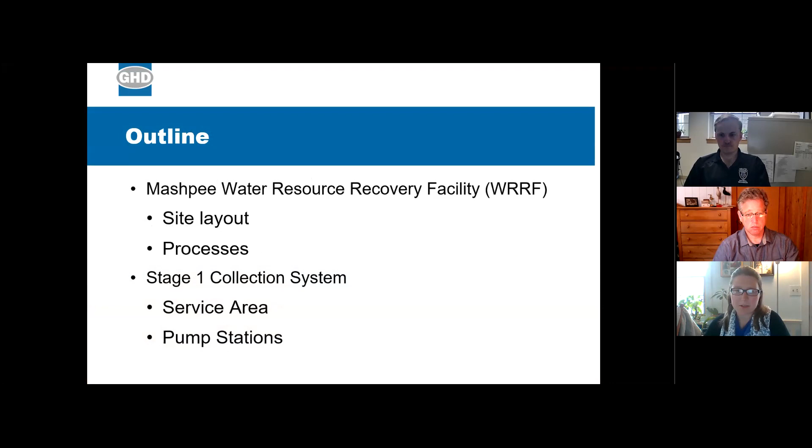We are currently designing stage 1 infrastructure, but have designed the facility to be able to have all of the infrastructure for all 4 stages within the footprint of the facility, which is shown in green here. So that footprint is defined by fencing around the site and landscape buffering. And in addition to that, we've been maintaining at least 150 feet of buffer from the site to property boundaries.

To the south of the layout is where the wastewater infrastructure will be. What's shown in yellow is stage 1 infrastructure. There'll be 2 buildings, which I'll discuss in a little more detail in a minute, and a series of underground covered tanks. And then what's shown in black dotted lines is space that's been reserved for the future stages of infrastructure.

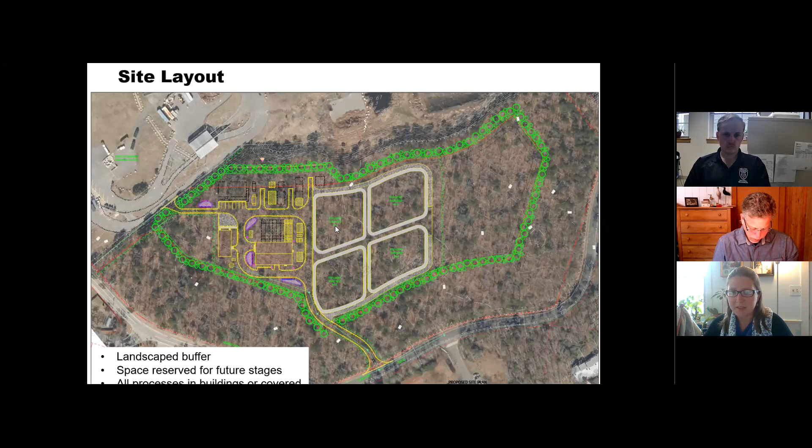Once the water is processed through the wastewater treatment facility, it'll be recharged to groundwater through 4 open sand beds in stage 1. And then to the north, there's been space reserved for future stages of sand beds. The infrastructure has been designed so that all of the treatment processes are either within a building or are in underground and covered tankage.

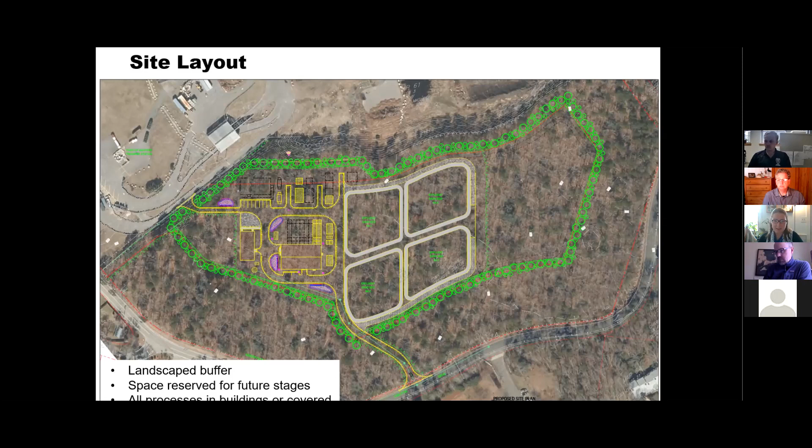The first building on the site is called the Preliminary Treatment Building. And so this houses a series of screens and a grit removal system, which takes the larger material that's in wastewater out of the wastewater before it goes to the treatment process.

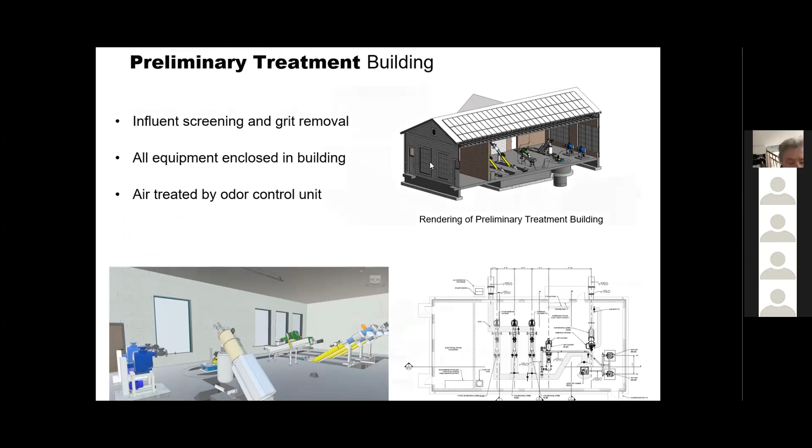Once the wastewater has been treated for nitrogen removal, it'll be conveyed to the UV disinfection room, where UV modules will be used to disinfect the water prior to effluent recharge. And the process building also holds a series of pump rooms. So the pumps are used to convey the water to the different treatment processes in the facility. It includes a blower room. The blower conveys air to the treatment process to aid in the nitrogen breakdown, and it includes a chemical room for the processes.

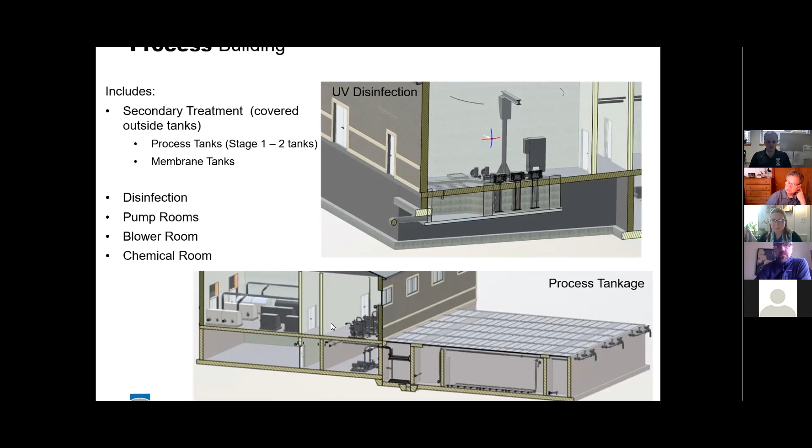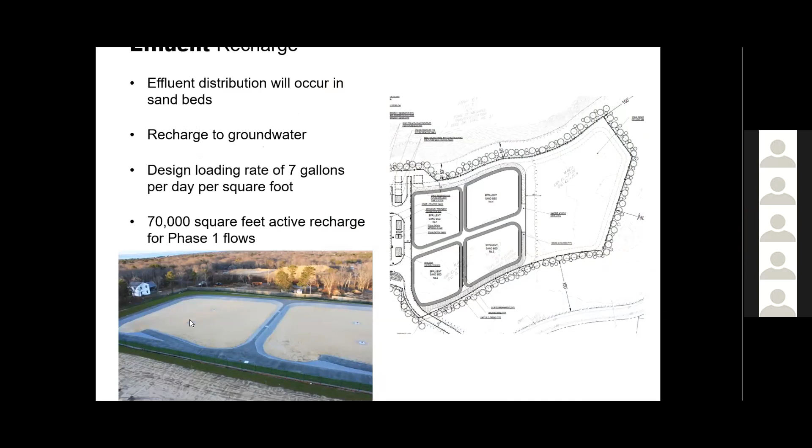Once the water has been treated and disinfected, it'll be conveyed to open sand beds. So this is an example of what open sand beds look like from Oak Bluffs, Massachusetts. The water will be discharged through pipes in the middle of the beds and will percolate through the sand to groundwater.

All of the air in the preliminary treatment building and in the headspace of the tanks, so that's the air between the cover and the water, will be conveyed through underground ductwork to a 2-stage odor control system. The first stage is a biological process, a biofilter, where there are bugs that break down the potentially odorous compounds in the air.

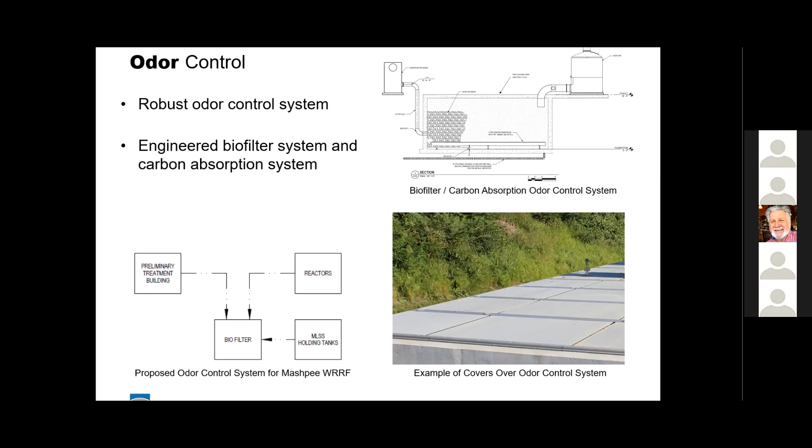And then the facility will also have the ability to convey that air to a secondary process, which is a carbon absorption system. And that's a physical process where potentially odorous compounds bind to active sites in the carbon vessel prior to being introduced back to the atmosphere.

And there's a small portion of properties, 10 properties, that will be connected through low pressure, which means that they'll have a small grinder pump in their house that will pump the wastewater to the collection system due to the elevation of that house. The service area extends to the northeast and to the south of the treatment facility, and we'll have 2 pumping stations which are used to convey the flow to the facility itself.

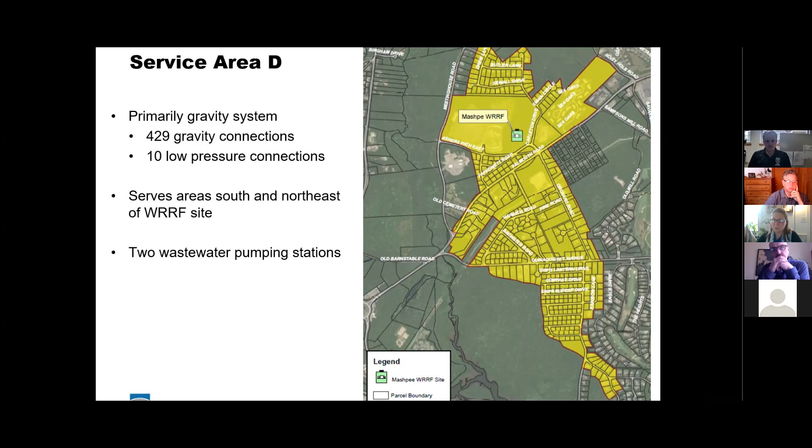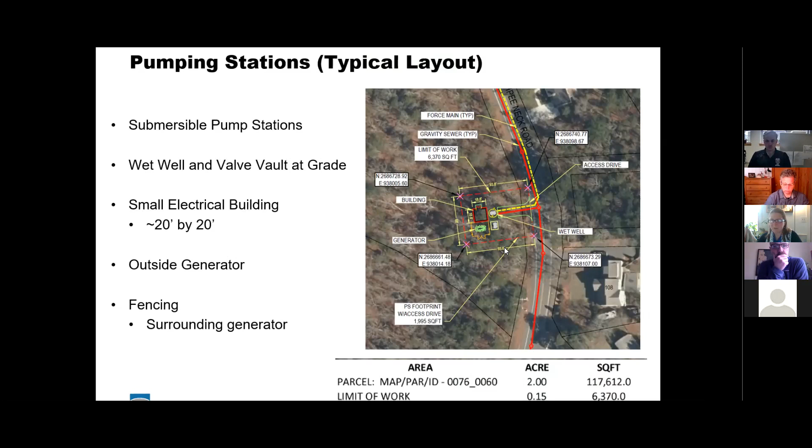All of the pump stations will have a very similar layout. They're submersible pump stations, which means the pumps are housed in a wet well that's below grade with a cover on it, and has a valve vault, which is another vault below grade that's used to control the flow in the pump station. The control panels for the pump station will be housed in a small electrical building that's about 20 feet by 20 feet, and each station will have an outside generator that will be fenced to provide emergency power if needed. And this is the typical layout that will be used for all of the pump stations.

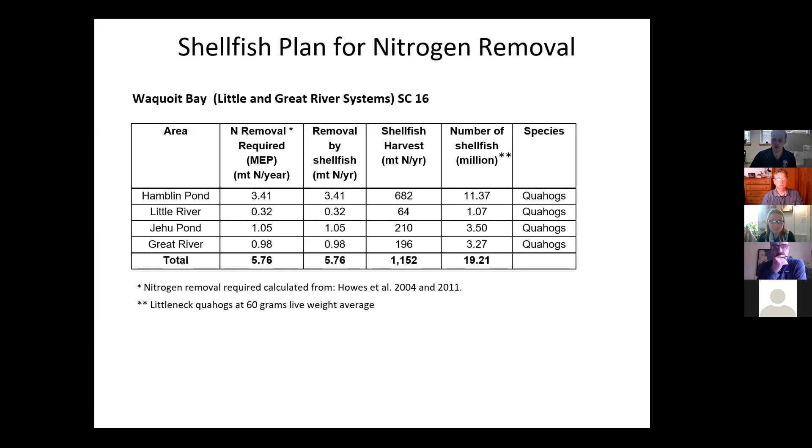So this first slide here focuses on a study that was done between 2004 and 2011 that sets out the number of shellfish for the Waquoit Bay water systems, which include Little River and Great River, to show how many shellfish per year, as you can see in this last column, would be needed in each water body to be able to remove the appropriate amount of nitrogen that would get us to a more normal level. So that would be these waterways here with Great River and Little River here.

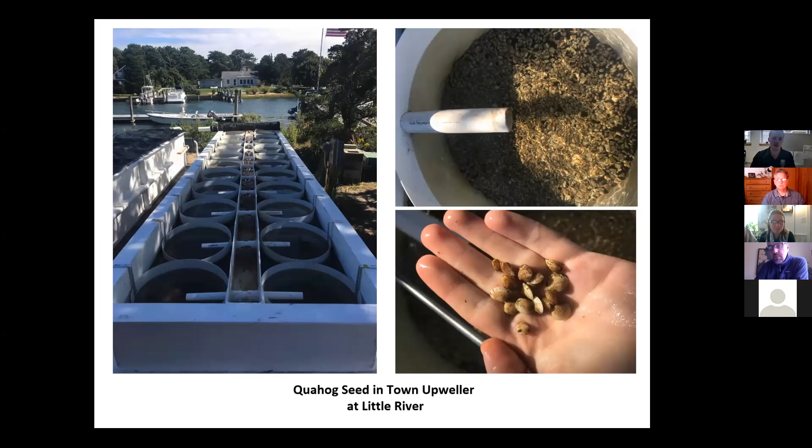So our plan, we've been taking smaller shellfish and through our own infrastructure with the town, growing them to a larger size. Through that process, we're able to buy a larger quantity of shellfish at the smaller size, and we're able to grow them to a bigger size so that when we put them out in the water, we can reach a higher level of survivability, so they can continue their life phase out in the waterways and focus on the nitrogen removal from the water.

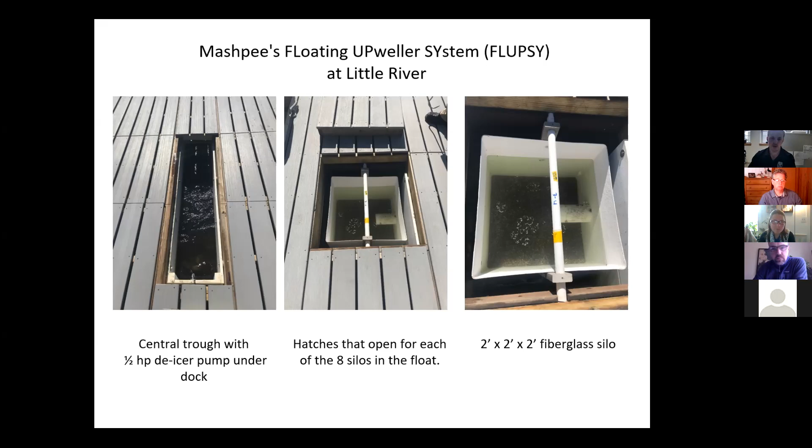These are some of the systems that we have in place at our facilities down in Little River. These are floating upweller systems, which, as you can see in the bottom here, contain somewhere between 50 and 100,000 seed per silo. And this process is seasonal and normally takes place during the summer months, with most of the seed, as we call it, going out into the waterways in the fall.

So these are some of the years. As you can see, when we started in 2014, we've slowly increased the numbers that we've gotten each year. And then these numbers are what goes into the water after our growing phases in the summer. And that's something that I kind of want to highlight here. As you can see, these numbers fluctuate a little bit. And that is due to the mother nature factor, as I call it. Sometimes it's just unpredictable depending on the food that's in the water, any kind of nature events that we have.

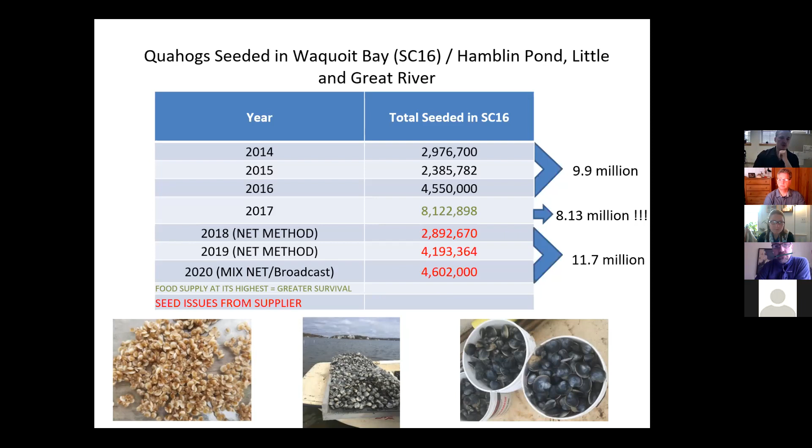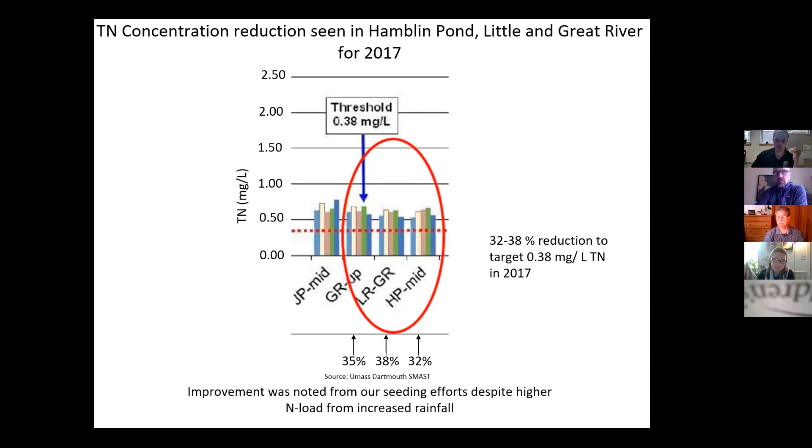While they're not quite at their target, we are hoping to get there as we fine-tune the growing methods, fine-tune the areas in which we plant, and fine-tune our infrastructure that we have down at Little River in order to increase the capacity of seed that we can take on each year.

We know this is happening because we do a lot of water quality in the Natural Resources Department, especially during the summer. We do it in partnership with the SMAST, the universities, the town, and the tribe. We have some permanent stations around town, and then we have other stations that we do on a monthly basis where we'll collect the samples and send them off for processing. And those have been really beneficial in order to show that oysters and clams can reduce nitrogen loading, even in nitrogen-enriched waters.

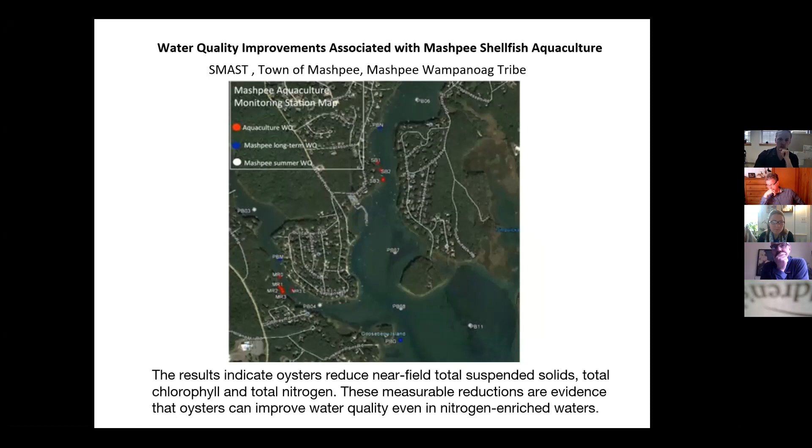So these are just some of the key findings that we found over the phases that we've done over the years. And what we found has been promising. We found that chlorophyll, which is basically the algae in the water, so it's the food that the various animals eat, both that and nitrogen downstream of these concentrated areas where we've been growing animals has been significantly lower. And when we control for all the other variables, it's been found that it pretty much has to be the shellfish that are having this effect, especially on different parts of the tide.

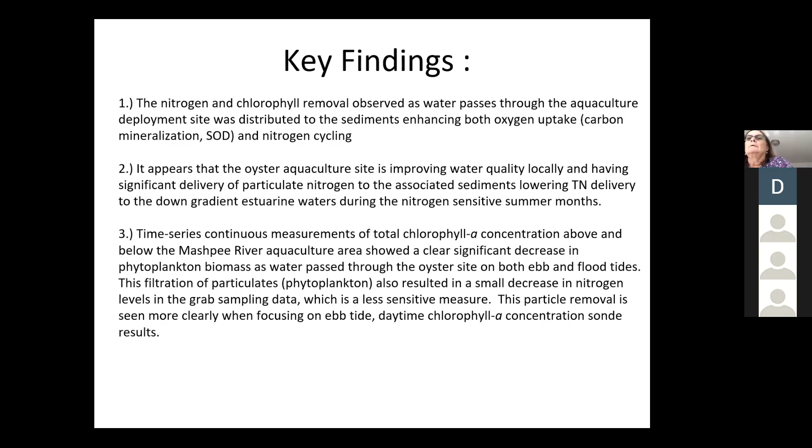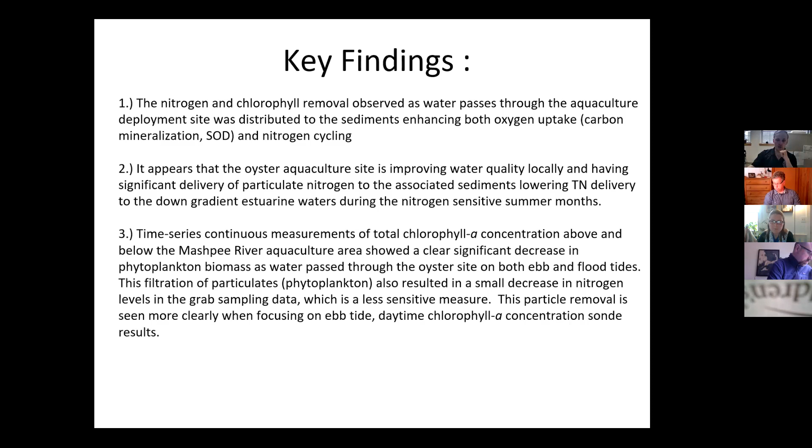When there are high algae blooms, it is normally associated with increased nitrogen loading in the water. And when there are high algae blooms, they can result in things called fish kills, where the dissolved oxygen in the water results in there not being enough oxygen for certain species of fish to survive in the water. We did have a fish kill about 10 years ago in the Mashpee River. Since we have started the shellfish program, we have had increased dissolved oxygen in the water and no fish kills. So it shows us that we are on the right track.

One thing that is important to note is that aquaculture, the town's propagation programs, is only a supplement to the overarching plan that Mashpee has to reduce nitrogen. If we were to hit a reasonable benchmark, which we're aiming to hit within the next 1 to 2 years, of removing about 1.5 million oysters per year from the Mashpee River, the studies we've done show each oyster, after its full growing period, has about 0.5 grams of nitrogen in it. That would reduce the watershed nitrogen loading by about 15%. Higher than that is clearly possible. In the whole chain of events, it is a multi-part thing.

So we would need to be able to increase the amount of oysters that we could remove from the waterways, or clams, which really is an important thing that we're looking into, boosting the commercial fishing industry areas and more rec areas in the town of Mashpee in order to fulfill the last part of the plan, which is the removal of the shellfish from the water.

We're starting to switch to these pieces of gear. These are called oyster cages. And what's significant about them is that they allow you to keep a lot of oysters in a very small footprint. So as we add more and more shellfish to the water, it becomes important to have places to put them. And so oyster cages allow us to work in a 3D space. They allow us to keep more oysters and move up as opposed to expanding outwards. So this is the next phase of the Shellfish Division's plan in order to add more shellfish to the water in a smaller footprint.

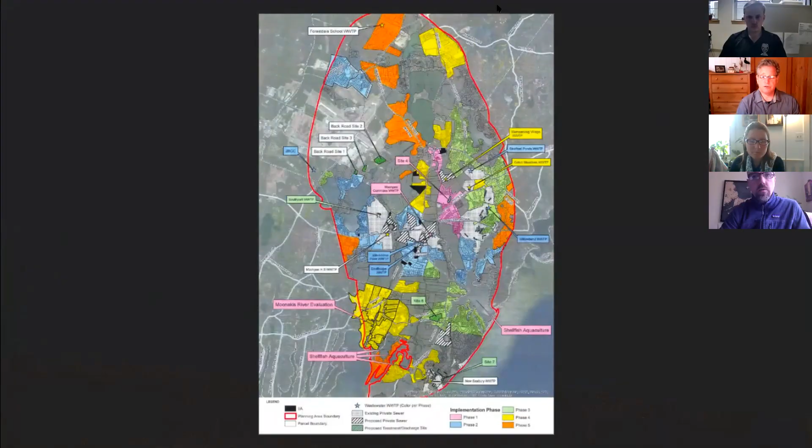Yeah. But basically, we have a 5-phase program that involves expanding the areas that require treatment and collection of our wastewater until we reach the point where we've achieved our water quality goal in the bays. The hope and expectation is that we will not have to implement all 5 phases.

What you're seeing on that map, the pink areas, constitutes phase 1. That core area around the cursor now, around the landfill transfer station area, down Quinaquisset Avenue along Mashpee Neck towards the portion of the Mashpee River woodlands. That is the portion of this project that is before town meeting right now. That will, in tandem with the work that Donovan described, begin the process of improving and restoring the water quality of Popponesset Bay.

We will then move eventually to phase 2. Phase 2 is the area in light blue, which you'll see continues along down south further towards Popponesset Bay, and then to the western portion of town, beginning the work that would remediate the water quality in Waquoit Bay as well. It's pretty clear that phases 1 and 2 are going to be necessary. Clearly, phase 1 absolutely is necessary. And obviously, nothing's going to get better in Waquoit until we begin phase 2.

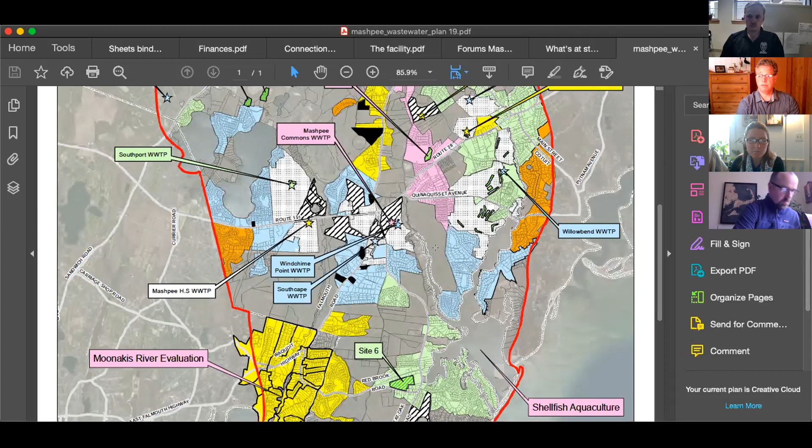So what I think we'd like you all to take away from this is that the phasing of this project was done to break it up into manageable bite-sized pieces. The design, construction, implementation of a sewering program is a complicated and time-consuming and somewhat disruptive process. So you see towns like ours up and down the Cape adopting their programs on a phased basis so that we can work in over time all of those complications and all of that construction and all of that financing at a rate which is manageable for the community. So you're not digging up the entire community at once.

Then you have an opportunity to see how the system responds to what you're doing before you make the next level of investment, and then the next level of investment on top of that. We have the option as a community to stop doing phases as we go.

Obviously, the objective here is to achieve a water quality goal that will reflect the restored embayment environment that has restoration of what, if you've been around town for a long time, historically was present in these waterways: naturally recurring shellfish populations, naturally recurring and maintainable eelgrass beds that provide the basis for a fundamental reproductive and habitat function for the fish species and shellfish species that rely on and reflect a healthy environment, and the ability, frankly, to stand in the water up to your waist and actually see your feet. That's what it used to be around town, and that is the goal that we're trying to achieve.

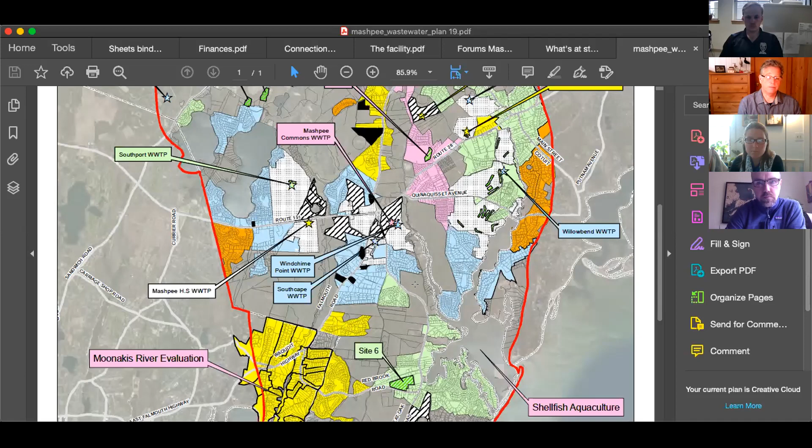I'll turn it back over to Patrick, and we'll tell you all that we, as he said, are running a session this evening and then again tomorrow on the finances of this project. So if you're interested in how that's going to work, we will offer a relatively deep dive into that, although to the extent we can answer questions about that today that don't interfere with talking about the shellfishing and the facility design itself, we'll attempt to do so.